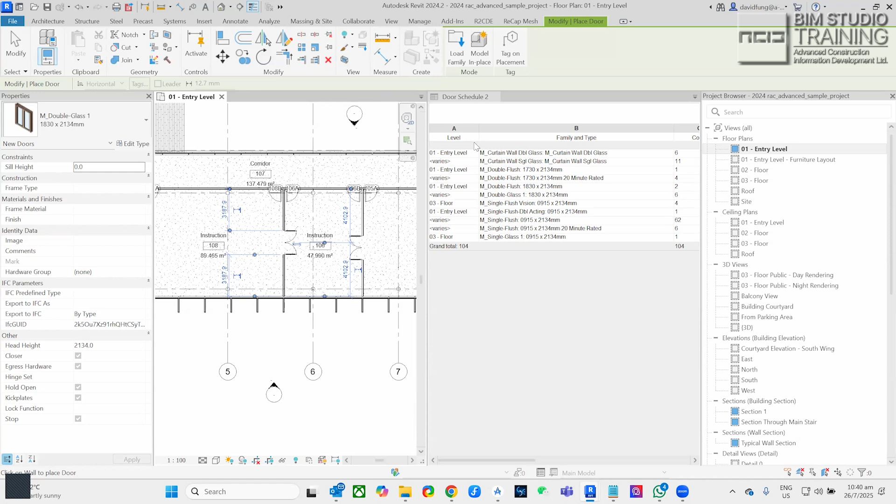So we said, okay, this is for QS to take this out. What if I show you? What if I show you, 20 years ago? What did I do? I did the

GBP submission to BD. What are these? Okay, forget about this overlapping. What are these?

What's this? These are 100% Revit. This is scheduling. All the submissions are automatic. Whenever I change the design, this will change the calculation, all automatic. The submission to BD has been automated.

We can save 70% of our work. ACS, automatic calculation system for GBP submission. It was issued 20 years ago. All the architects in Hong Kong can save 70% of their time.

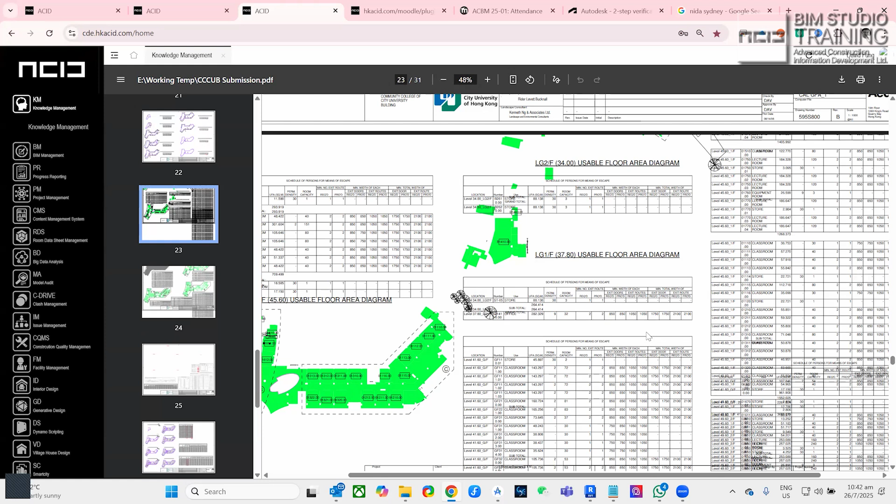No sales, nothing, 0. People don't use better ways, so we are the most unproductive industry. Okay, now and then later on, ASC takes it, housing takes it, BD. Okay, now look at BD now.

BD, BIM. BIM automated checking tools, area tools. Okay, if you click on this area tools, download the template. So what did BD do? BD employ a consultant to do this, to automate the process. Now become the automated tools for the industry to use.

So the BD employ a consultant. This one. My colleague, an architect, Samson Wong. Now he's the same as me as a BIM consultant. So doing a lot of this consultancy. So we did this 20 years ago.

And the architects in Hong Kong are still using CAD and draw line by line, doing the calculation Excel manually. And we can save 70% for the last 20 years. And nobody cares. Until now, you see the government actually adopted 2029 mandatory for everyone.

See the change that BIM bring to the industry. See how ineffective, how unproductive we are. Okay, technology is here, workflow is here, it's proven. But what is missing? Your change. You change. It's human. All right, people don't want to change.

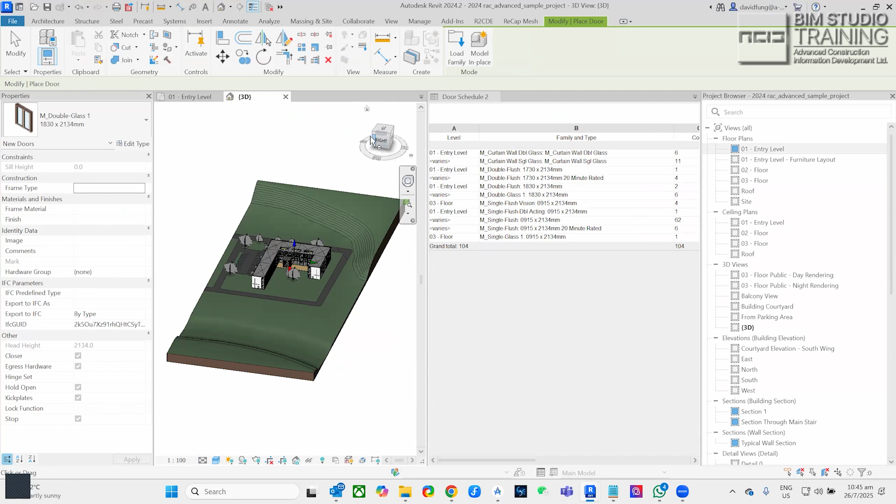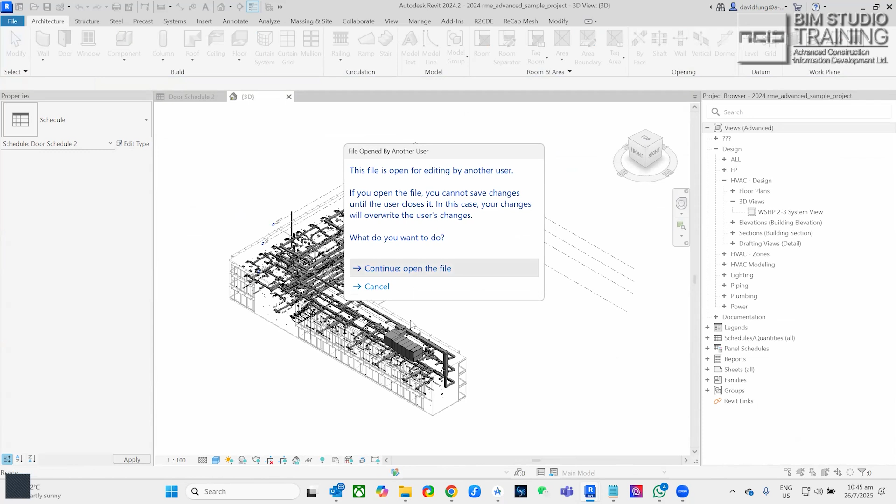All right. Now, can everyone help me to do one small exercise? Can you open up the MEP model? Okay, go to the sample. Go to RME advanced sample project and open that. Okay, everybody. Now let's do a small exercise. Now this project here. Okay, open it up.

Now, treat it as a game, treat it as a competition. Now, listen to what I say. You have a model of having a lot of E&M system, MEP system. I want to know, listen, which air duct is the longest? How long is that? Where is that? I want 4 answers.

What is the longest air duct? Longest. How long? Where is it? Okay. Now I give you time. Can everyone try and find me these 4 quick answers? The quickest one in my previous lesson is 40 seconds. 40 seconds. Okay. See if you can find it.

Which duct is the longest? How long? Where is it? Okay, go ahead. See how long it will take you to find it. Air duct, longest air duct. How long and where is it? How can you find these 4 answers?

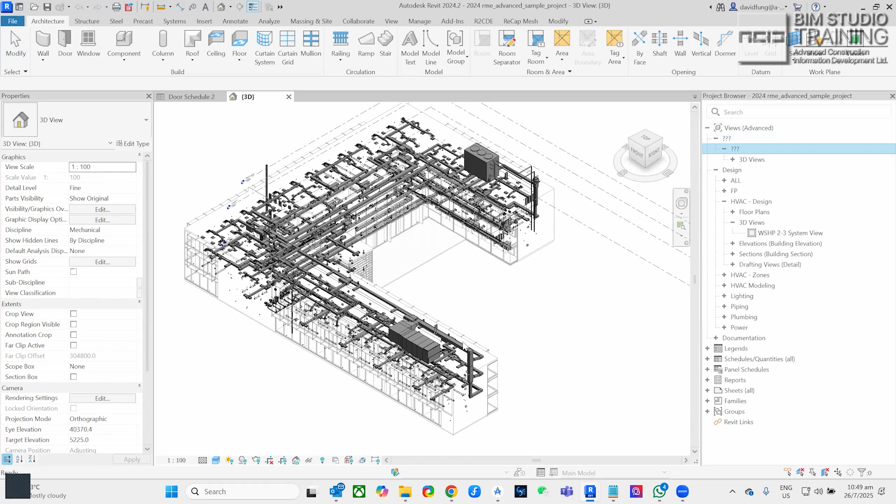Okay, location level 1 is correct. Okay, it is this one here. This one here. 52.71. Okay, this one's longest.

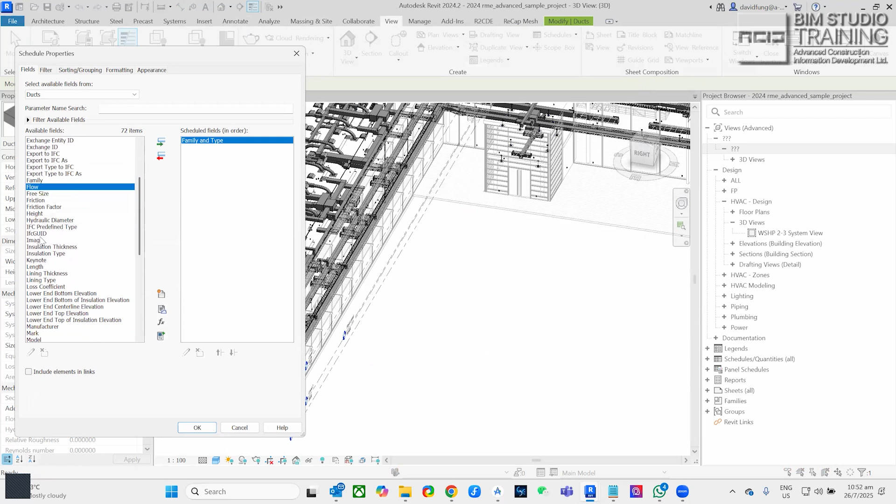And then length, that's it. In 1 second, you have all the length in here. But I want to say, what is the longest? How to work that out? So you sort it by length, descending order.

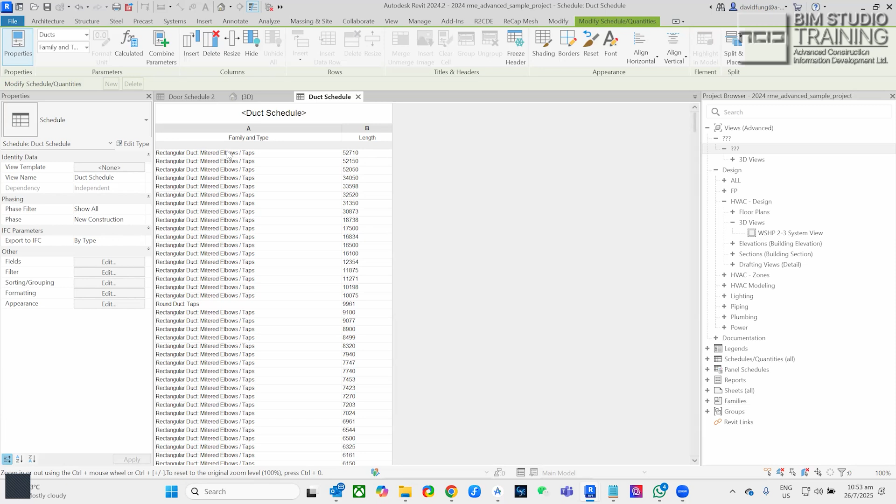Okay, where is it? Yes, you click on the longest one and highlight it in model. Click on this. There you go. You highlight it in here. So you can do it in 4 or 5 seconds.

You think in information. We don't think in model. So this exercise just wants to make you aware that if you look at it by eye, you are looking by luck. You are not doing it systematically, and you're wasting time looking for it.

You see these three are very much alike. How do you know which one is longer? You click on it and then read down the number. Or you try to remember - if you have 30 story, 50 story, you forget which is longer, right? They look pretty much the same length. So it is not systematic. Information is the key. So the value of BIM is information.

All right, so now you can see that this model has a lot of information that you can make use of. Basically, all the work that we do, whether you are a designer, a contractor, or BD, everybody in the industry uses information. But we just get used to using visual, using graphic, plan. This is a model. We don't think in information.

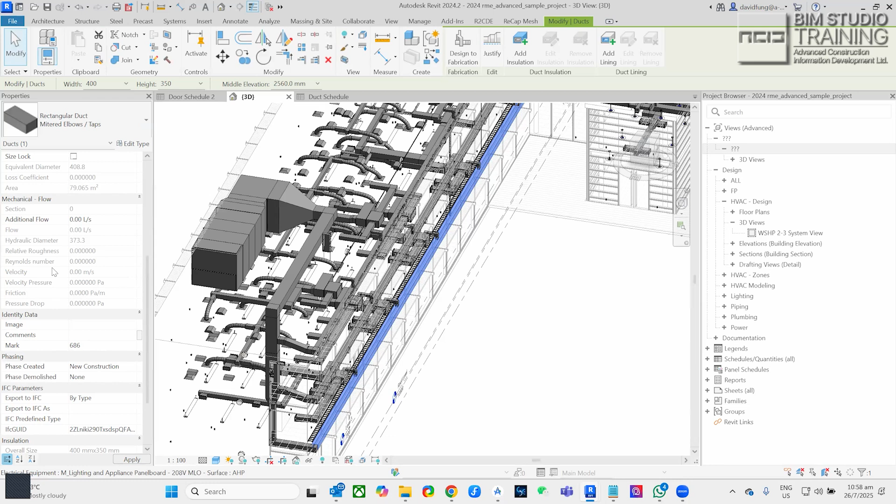Okay, think about this - now you're going to be a BIM manager soon. So how are you controlling your project? Are you directing the project to be geometry or information? I know that, okay, your company works a different way - you have a separate team doing the BIM, but you have a team doing the project and producing drawings. So the drawing and the BIM are kind of a separate thing. Is it the right way?

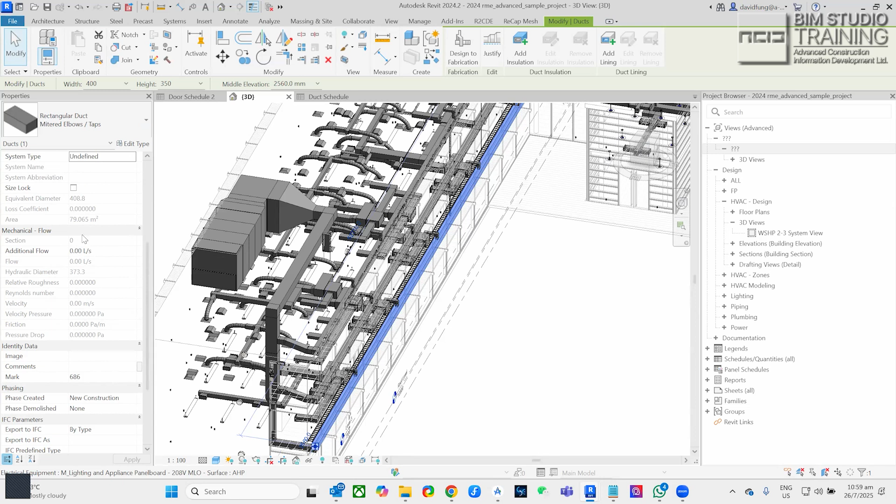Right, so one day, the drawing gets rejected, and then what? All right, now you can see these are the characteristics. So number 9, scheduling of information.

So this is a very important concept: single source of truth. You put information there. The information model is the model, and then you can schedule it out.

That's why I don't think Rhino alone or 3D Max is BIM. It's got no information there, it's only got geometry. So that's not BIM, it's 3D software.

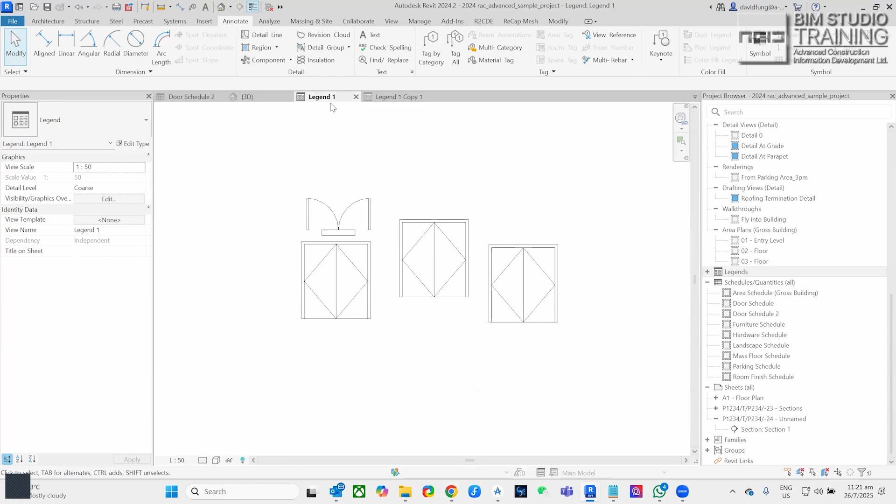OK good, alright, so we're talking about so many BIM characteristics.

It applies to every different BIM software. This is a common thing. These are important concepts that you as a BIM manager need to grasp, because these are related to the next topics in terms of BIM use.

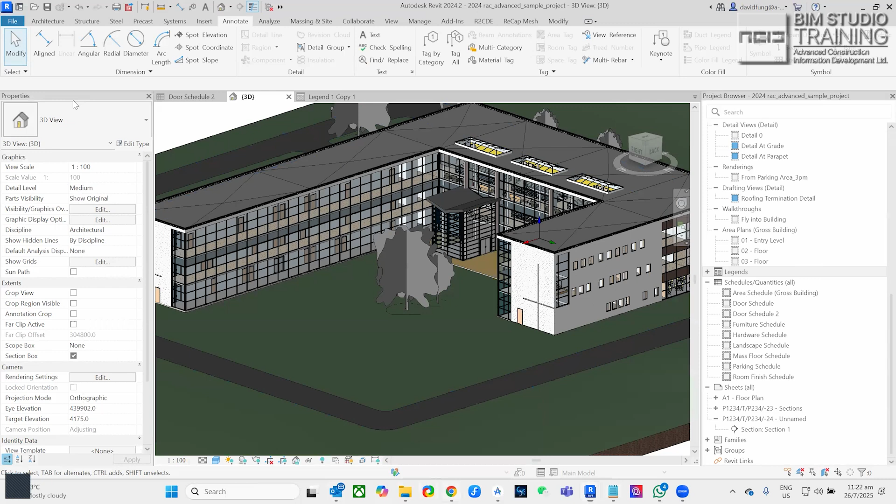Now, as I told you in the technical circular, in lesson 3, core competence 3, we are talking about BIM use. So we will be basically talking about 20 of them. These are the applications, but the technicality behind it is something I'm just telling you on the BIM software.

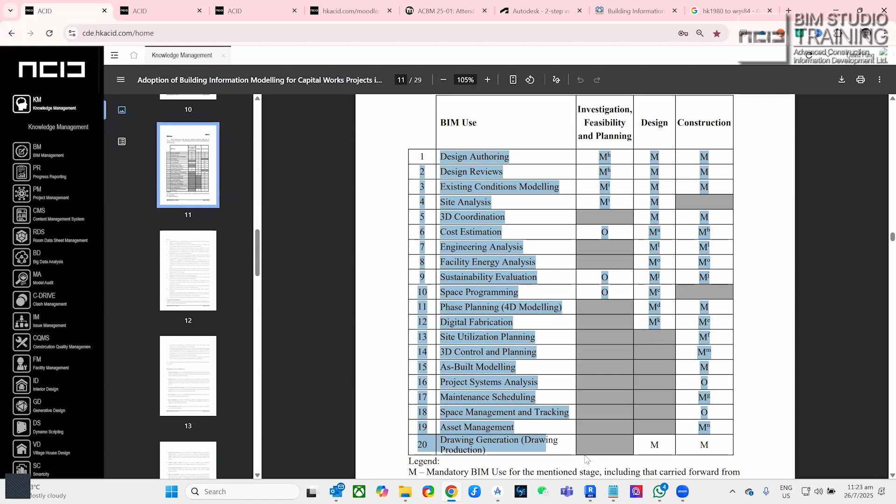All right, I think I'll just stop at the characteristics for the time being. Now I'll move on to the second part, which is on the technology side. If you put this technology into context, these are the context - how technology is being used.

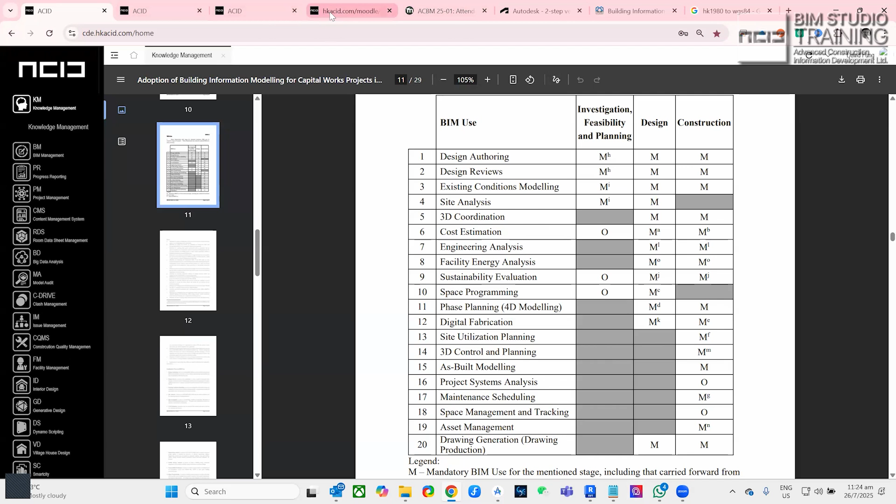Now, the way we look at it - if I call upon this one here. Now if we look at the technology, the second part, we'll be talking about 14. 14 technology here, 13, and then here 14.

So how can these technologies apply into different contexts? Say, for example, if I jot this out. Okay, now if you look at it this way, the way we understand this.

Let's say we need to do something called 3D control and planning. 3D control and planning, which is mandatory - this is how we use BIM in construction. But what does it mean? What is 3D control? Now, this is the way we use BIM, but the technology is actually in here.

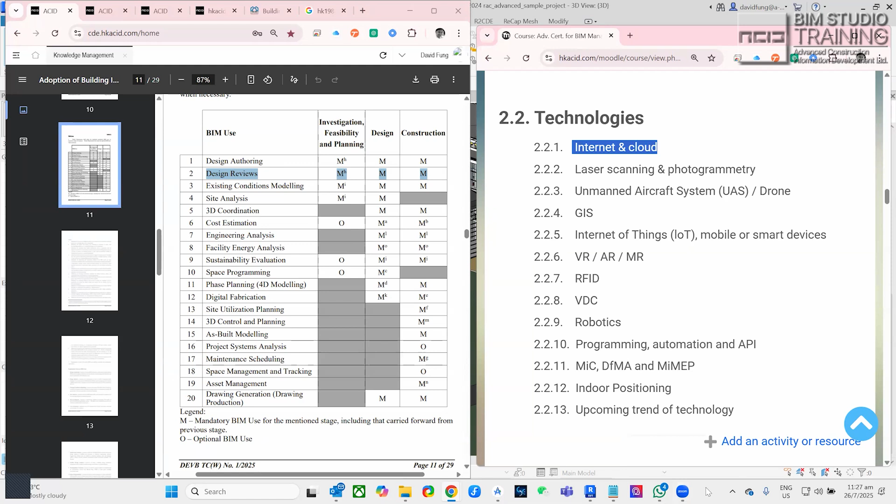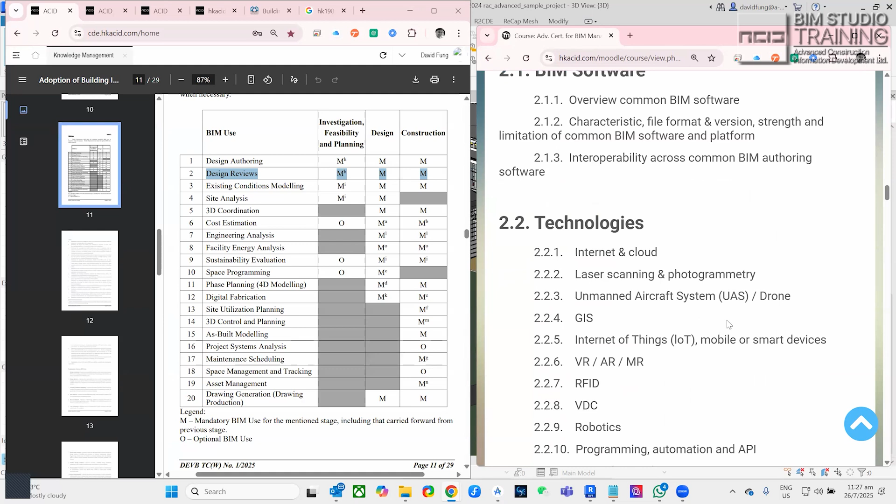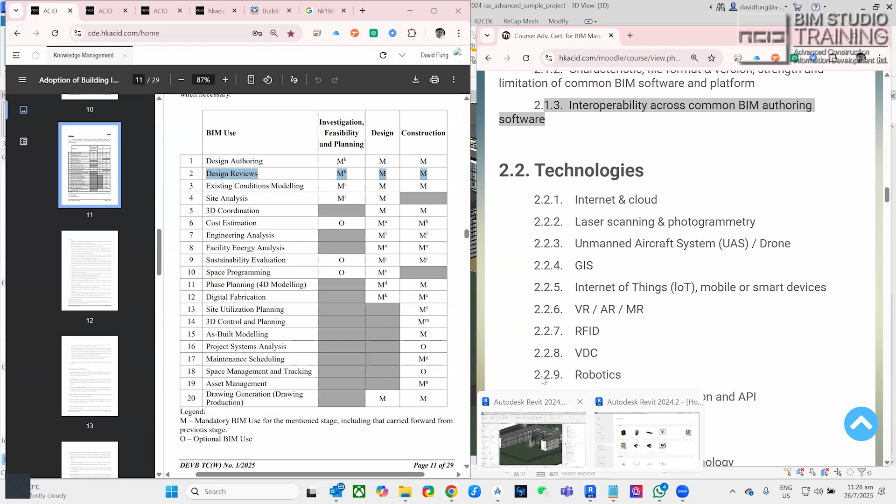All right, now let's look at it from the start. Or probably I can cover this as well. Before I talk about this, let me talk about this one. Now if you look at BIM software, obviously this is Revit.

This is the architectural model. We look at the structural model, we look at the MEP model. So those are the different people working on the same project using the same platform. What if they are not using the same platform? What will happen?

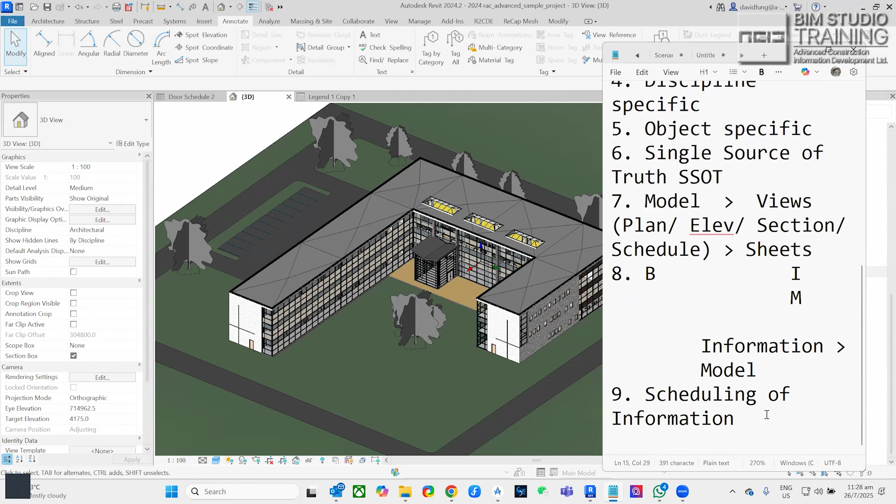If I ask you now, if you look at this model here - so the building is done by Revit. What about the trees? What about the road? What about the landscape, the terrain? I tell you what, people use Revit to build the terrain, to build a road.

It is horrible, it's terrible. I once worked on a project where the building is fine, but all four sides have different slopes - it's not flat. They all have different slopes on the four sides, and they're not single slope - very complicated terrain. Then we use Revit - I spent months to model it. It's terrible because Revit is not meant to do this kind of thing. You know what is good at doing this terrain?

No, terrain, the modeling. GIS is not about modeling. GIS is a platform that combines everything. So what modeling tools do you use for terrain? Civil 3D. Civil 3D is good at doing this, because the road is not flat. Of course elevation goes up and down, but even on a little section, the road is not flat.

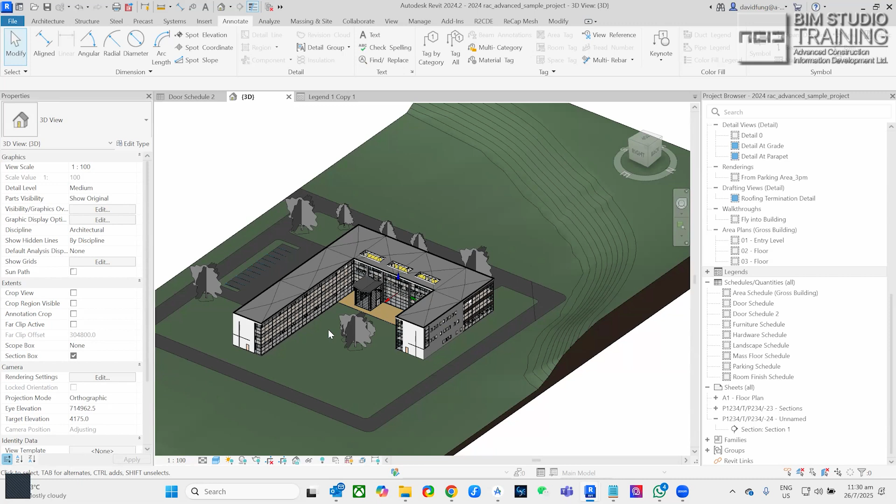It's doing a slight curve at the sides because the rainwater will fall down to the gully. All right, now you guys know about that, right? So Revit cannot do that. Revit is not a good tool to do the site and the terrain.

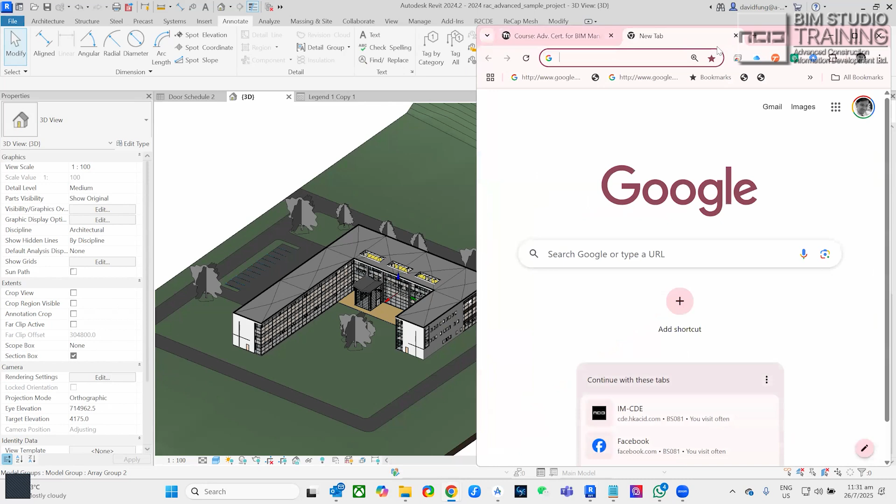Landscape, you see the trees? That's quite terrible. Now, what software do you use to do the landscaping? Do you know? Okay, CS Artisan. Okay, you can see that.

This CS Artisan is actually a plug-in software added to Revit. So using Revit alone is not good enough. Why? Because of things like this hatch pattern - if you want them all the same height, same type, but following the terrain, using Revit to build one by one is no good. It's very hard to do. So they use this add-in called CS Artisan.

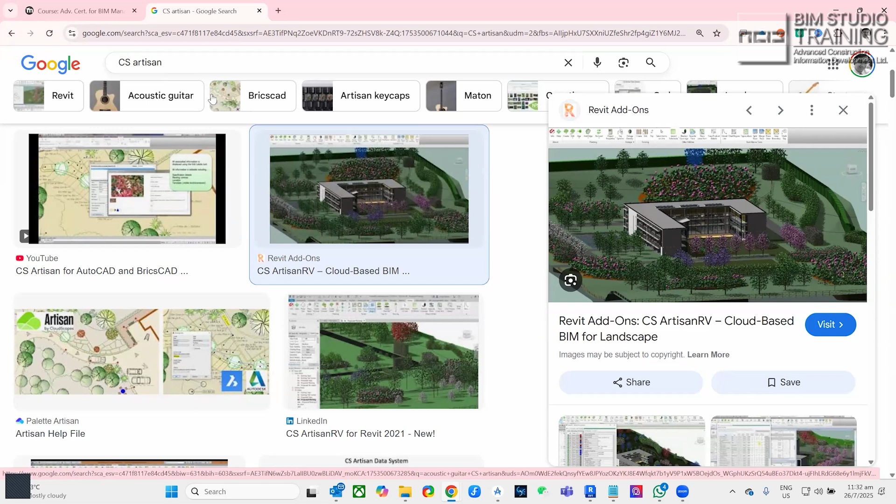This is something I teach in ASD for the landscape architects. I teach them how to use that. Even though it's still Revit, it's the add-on that makes it easier to do this kind of thing. All right, CS Artisan.

That means we will end up with a lot of different softwares. To an extreme, you can imagine I have one project with government. So it's one ASD project. What they ask for: architecture, they use ArchiCAD. They need to use ArchiCAD. Structure, they use Tekla. MEP, use Revit.

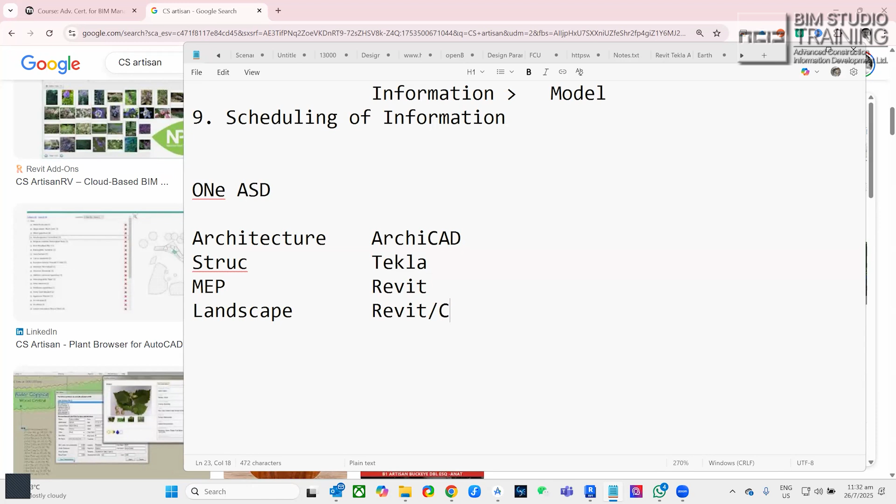Landscape, using Revit, CS Artisan. Okay, CDE, Trimble Connect. Structure, civil - Civil 3D. This is one project in the design.

Think about this, this is an example, a very extreme case. So if everything is like this, what level is this? Level 2 BIM. They do not talk. How can we work? How can we work as one project?

So okay, you can see the difficulties. Now, as a BIM manager, the client asks you, this is how I want it, this is how I want it. So how can you handle this? Not everyone is using Revit, so inevitably you have no choice but to come to the concept of open BIM.

Small letter 'open' and then big letter 'BIM'. You see this concept, open BIM. The keyword is interoperability. Interoperability - how can we talk in the data? Interoperability, so they can talk to each other. So now there are two levels of interoperability: one is on the geometry, one is on the data, on the non-geometry.

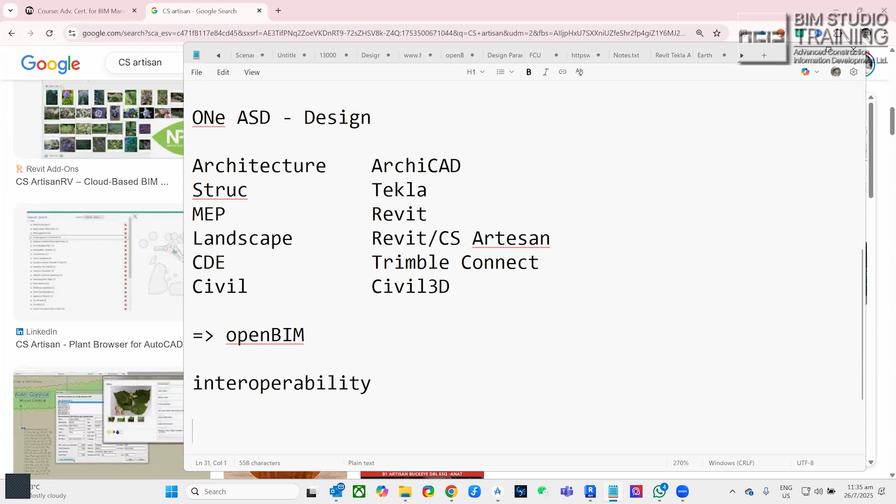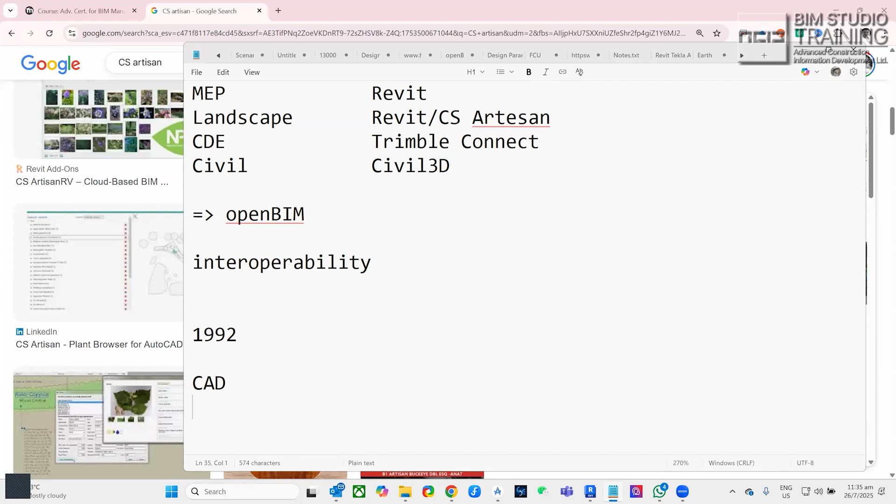So if you're not familiar with this, let me give you an example. In the year of my graduation, I graduated in 1992. All right, I graduated in '92. When I started working, this was a time when our industry started using CAD. When they used CAD, there were two camps: one is AutoCAD, the other camp is MicroStation.

So in the industry, CAD is the general name, this is a brand name. There were two companies doing very well in CAD. In the 1990s, they could not talk to each other. AutoCAD could not talk to MicroStation, MicroStation could not talk to AutoCAD. So what was the answer?

Do you know? So they created a format called DXF, Drawing Exchange Format. Now from AutoCAD, they export to DXF and then import to MicroStation, or vice versa, and it comes back like that. So they needed a middle format - they couldn't directly talk to each other, so they used DXF, Drawing Exchange Format, to communicate.

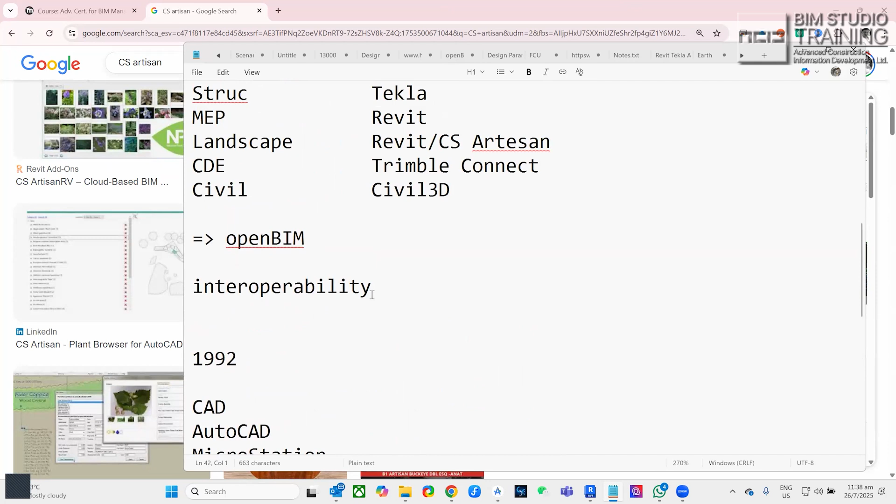That's it, so it's easy for translation. But in BIM, it's different - BIM is very complicated. So at the moment, we still cannot have direct communication. What that means is, for example in Revit, what you can do is export to a format, an open BIM format - at the moment, IFC format - and then import to another software like ArchiCAD, or vice versa, coming back like this.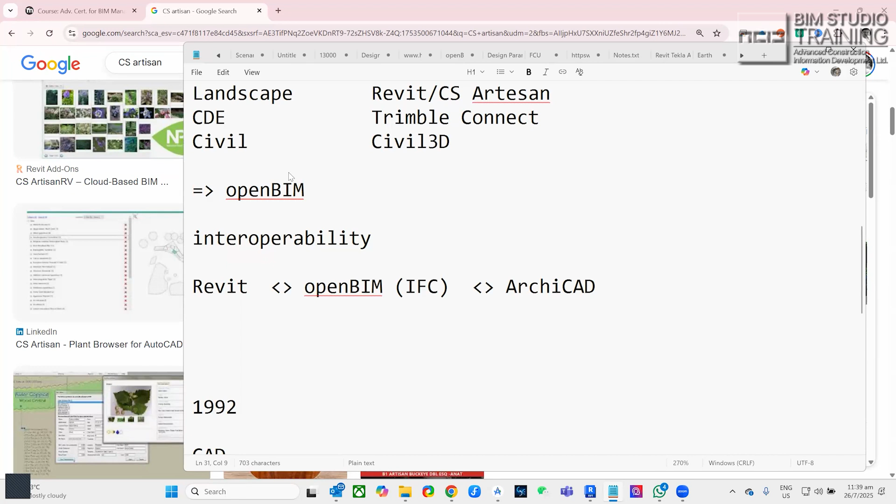So you have this middle format called, at the moment, IFC. That's why last time you heard about the Lands Department talk about native BIM and open format, level 2 and level 3. So IFC is one format of level 3, and CityGML is another format, which is also open format. Now this concept of open BIM, if you go back to the technical circular...

What is the policy? The policy is now required: BIM model in open BIM format for asset management should be prepared. So BIM model in open format for asset management is what? It is the time where the contractor hands over the BIM model to the operator, so you need to give them a BIM model in open BIM format.

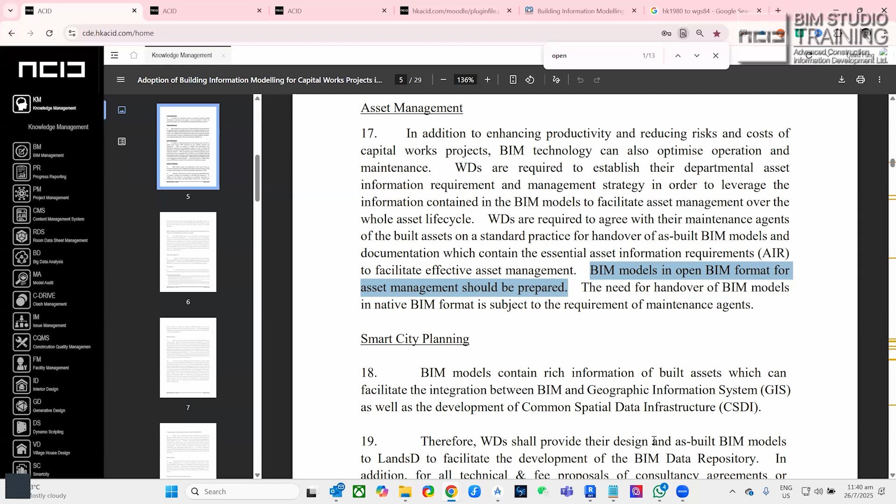So asset management, the operation - he's talking about the contractor delivering back to the operation in open BIM format. And also, Works Department should consider to use - they should use open BIM approach in project collaboration, except individual circumstances. Now that means only with exception do you not have to use open BIM.

So this is exactly the project I just told you. They have different formats of BIM software. Project collaboration is talking about different people - different people can use different software, and then the project collaborates using open BIM. Now this is another policy. Get that?

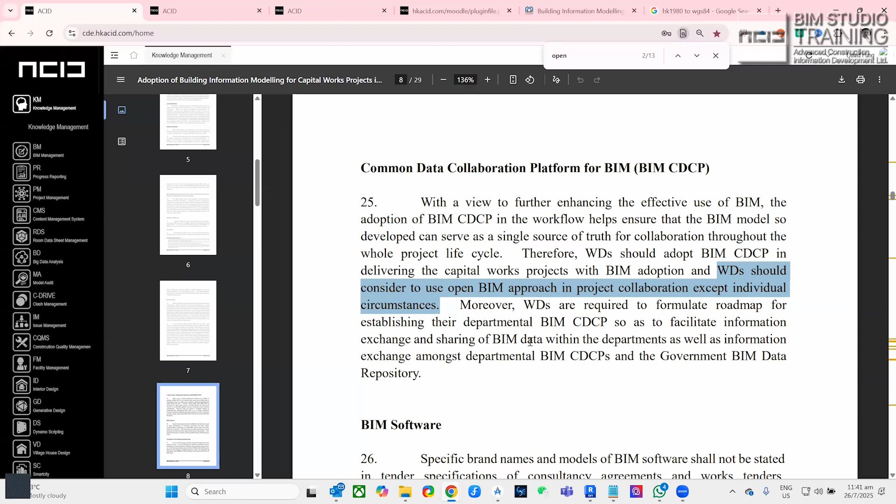Works Department should accord priority to consider adopting open BIM in different project stages. So in software, open BIM is a priority. That means they do not promote just one platform - they promote different platforms.

Now, as a BIM manager, this is a really difficult situation. If you have different stakeholders using different platforms, how can you make them talk to each other? It's a difficult task. All right, now I tell you what - for this project, yes, we use this.

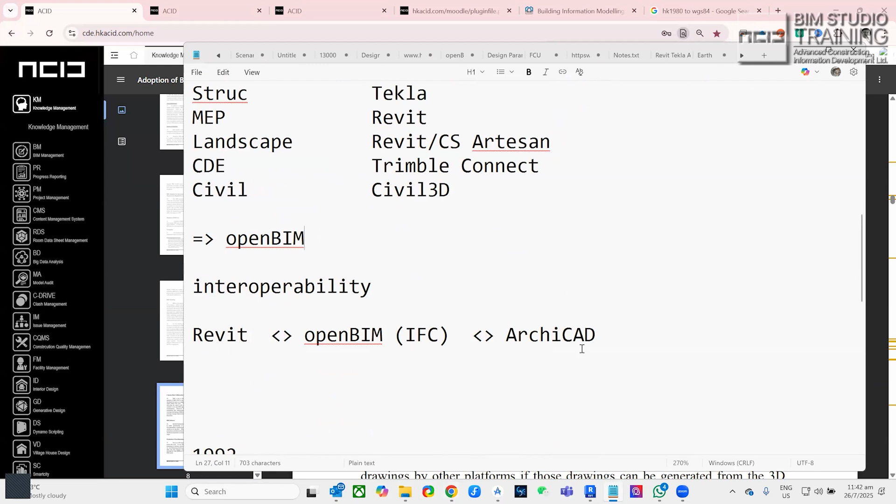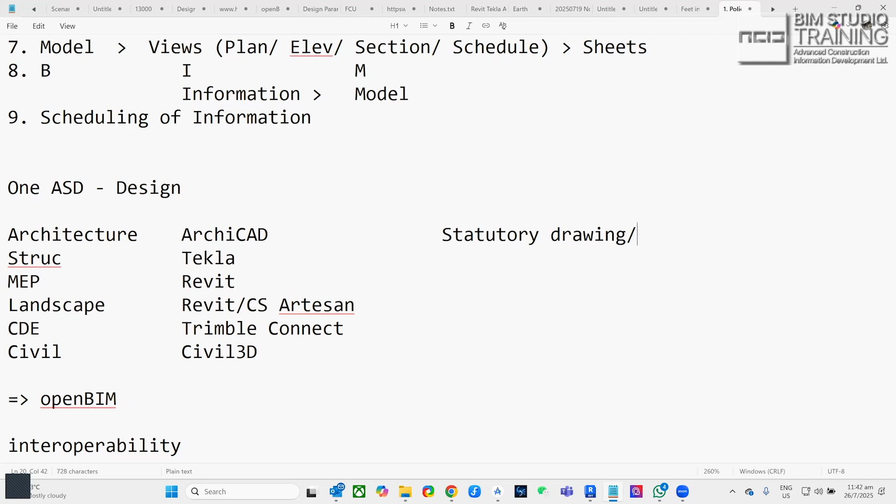Now look at this. What do we use this for? They produce architecture, produce statutory drawings, they produce tender drawings. Structural engineer, they produce statutory drawings, they produce tender drawings. MEP, they do not need to produce statutory drawings, they produce tender drawings. Landscape, tender drawings. All right, QS.

Now another difficulty - this is what I have experienced, this is the real situation. So the architect uses ArchiCAD software to produce GBP, to produce structural submission, audit submission, right, sorry, Tekla. For tender drawings, they produce different architectural tender drawings, structural tender drawing, MEP tender drawing, on another platform.

QS need to measure this, they need to measure this, and they need to do this - that's difficult for the QS. So the QS needs to know 3 different softwares to schedule. The one you just learned scheduling is from Revit, but what about ArchiCAD? How do you schedule from ArchiCAD? How can you schedule from Tekla? They have this kind of concept, but you need to learn it. So the QS needs to know all this.

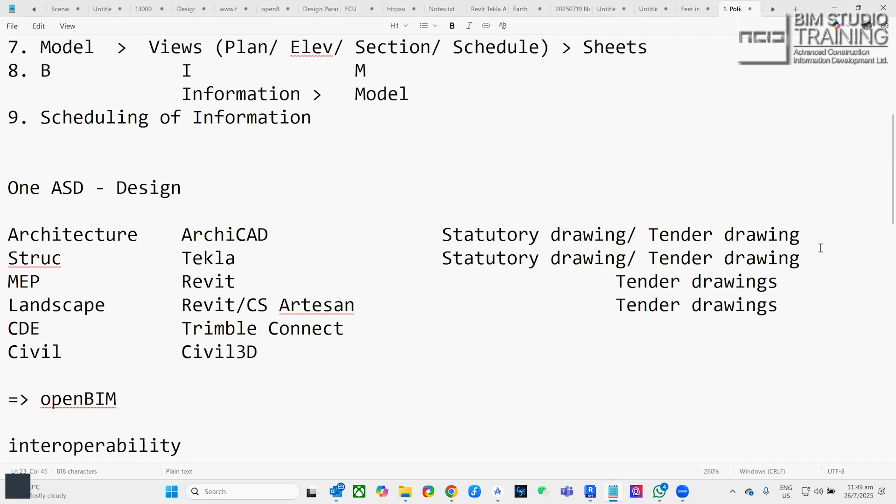It is quite complicated, I have to say. But you can see that now it's a policy here - it's facilitating the use of open BIM. So our first core competency, open BIM, is also one of the policies.

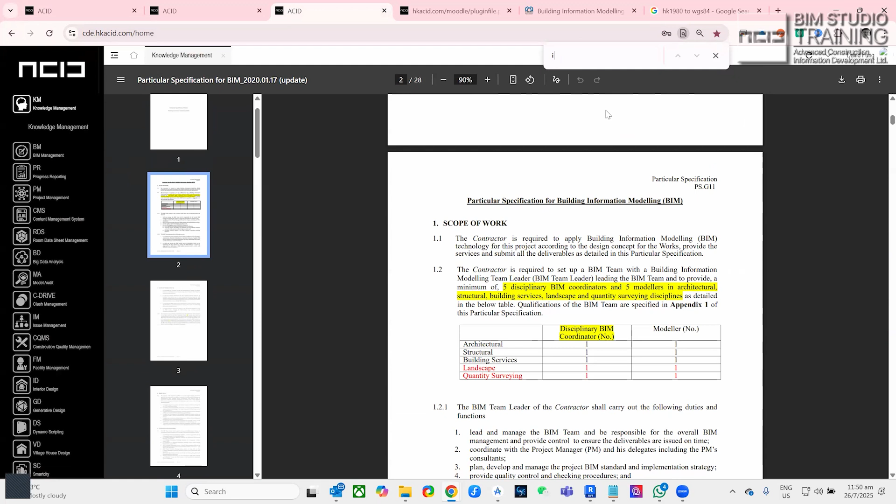If we look at it from the contract point of view, I showed you last time. Now the contractor shall submit in the format the contractors use. You produce a BIM model using native and editable formats. If you use Revit, you submit Revit. At the same time, you need to produce IFC, the open BIM format - two formats. So if you use ArchiCAD, fine, ArchiCAD plus IFC. Tekla plus IFC.

But it did not address the situation where the consultant uses open BIM and you are not open BIM - then this is an issue. And then later on, how does the contractor give back to the operator?

Think about this. If you are the contractor, you keep on using different systems - Tekla, ArchiCAD - and then you go back to the operator.

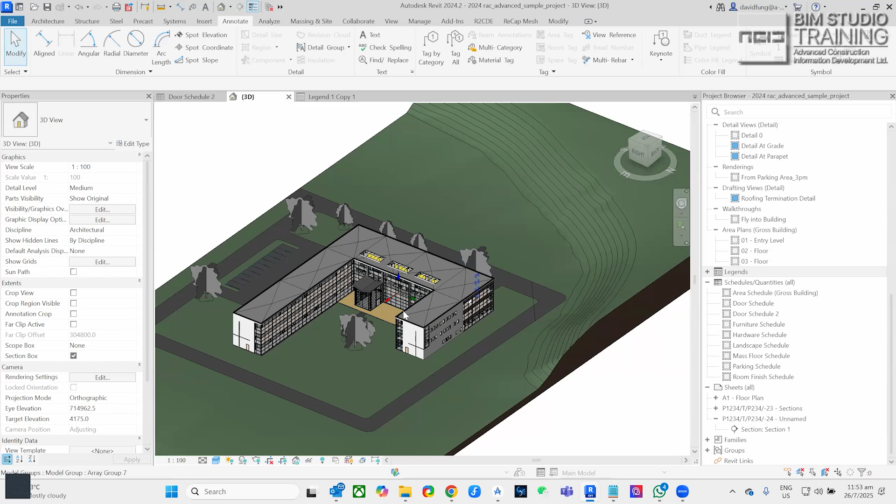Okay. All right, but the thing is, this is called interoperability. Now if you look at Revit, so just a few technicalities on this.

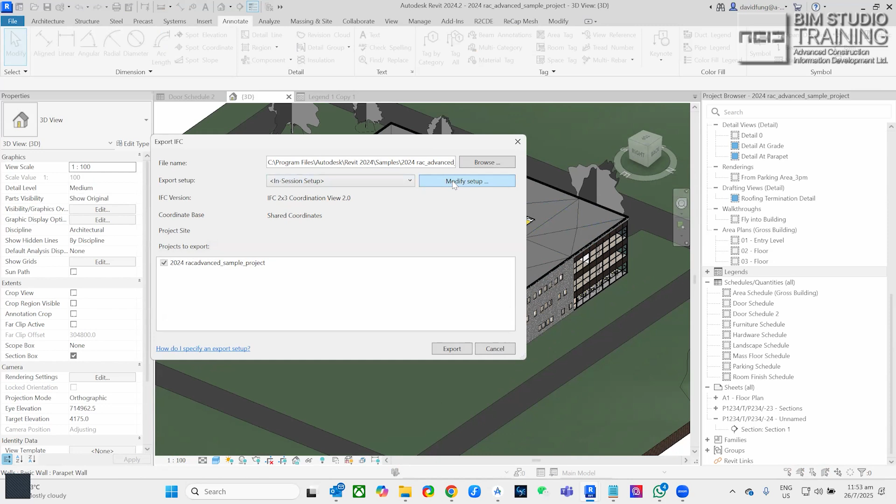So this Revit, all this kind of thing is called - if you export to IFC, okay, you export to IFC. Now, you can see the Modify setup.

See, even in IFC, they have different versions - 2x3, 2x2, 4, 4x3, now even 5, different versions. Their versioning is different to the Revit version. Their versioning only means they include more and more objects. So 2x3 is putting on buildings - they do not have roads, railway. 4.3 has civil, 4.3 has rail, so railway objects. But the building object is still the same.

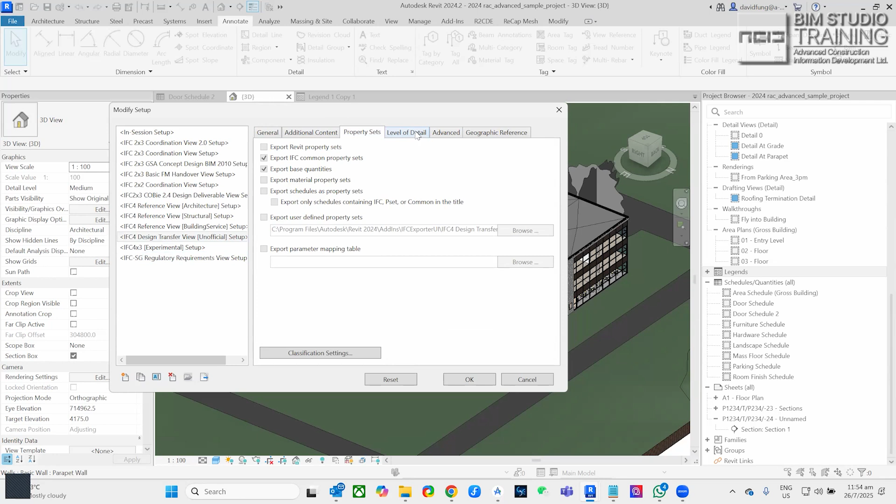So even if you export this out, let's say, okay, I want you just to take a look at the definition. Now I just click on a door. Now when I say interoperability, what does it mean?

A door, as I said, has information, and the information has definitions. So that door has a height, this one here has a width. Now these words, height, width, thickness, these are the words used by Revit. What about how they describe the width in ArchiCAD? How do they describe it in Tekla? They may use a different word.

So this is called thickness. What if ArchiCAD uses door thickness? Then you have two different names, and then you cannot talk. So that's why different software use different names, and that's why they cannot talk because of this kind of naming issue.

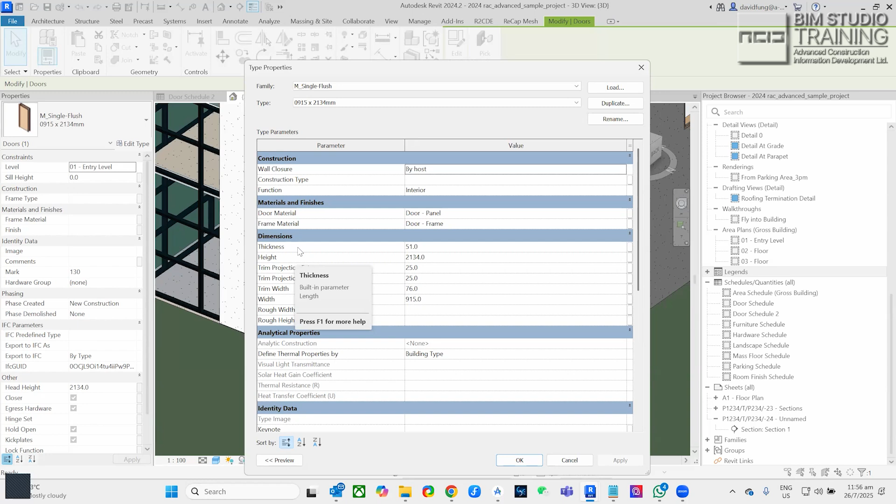So what IFC does is have a standard. Now what does that mean? If I look at this, if you go to the IFC Predefined Type, okay, I click on this. Now you can see these names, IFC door, IFC railing.

Now these are internationally defined names. If Revit can convert into this name, ArchiCAD converts to this name, Tekla converts to this name, so that becomes a standard. It doesn't matter what you call it in your native software, as long as you convert into a commonly named system, then they can share. So this is the idea of IFC, open standard. Somebody at buildingSMART actually defined how this should be called internationally.

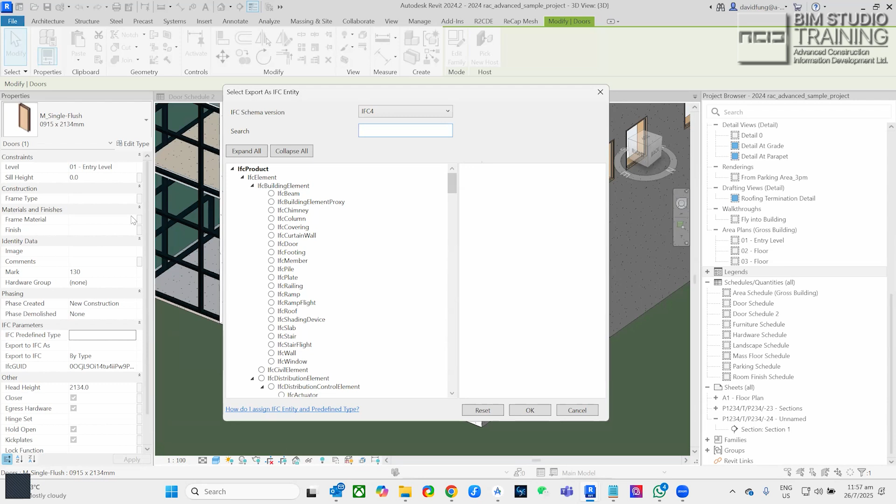Okay, now to be more specific, the naming is one of the items. BSDD, Building Smart Data Dictionary. So what is a door? A door, we have thickness, we have vision panel, all this kind of thing.

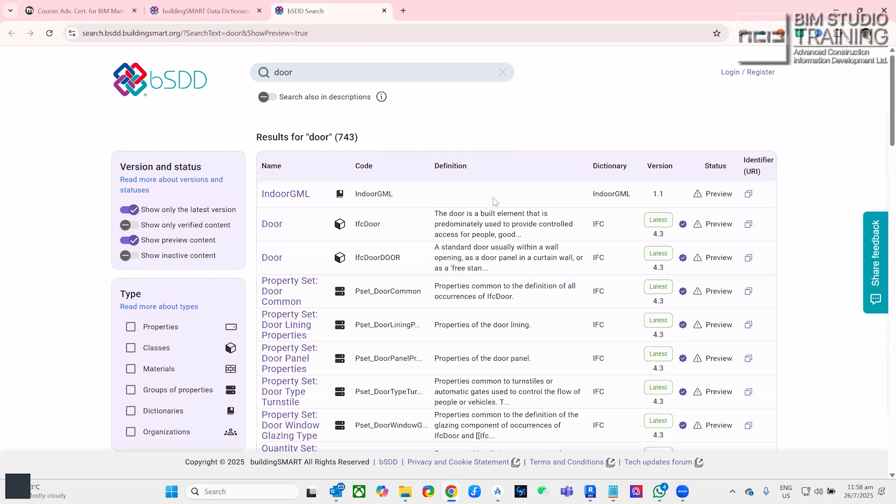Okay, what if I type in door? How is a door defined in OpenBIM? So I search for door. Okay, see door, property set. Click on the property set, properties. You see that? Acoustic rating, durability rating, fire exit, fire rating, glazing area.

Right, now these are the IFC names. Revit uses a different name. ArchiCAD uses a different name, so that's why they don't talk. What if both convert to the same name? Then they have the same meaning. So this is called BSDD, data dictionary. It is for us, so somebody defines millions and millions of these definitions, and then different software convert to this data dictionary. Then they know, then they have the same meaning.

Two weeks ago, BD was here. The assistant director was sitting in here, and he said BD is going to use BSDD a lot to define the names, all the submissions. That means this automation here was based on Revit alone. What if ArchiCAD? How can you automate ArchiCAD? How can we automate render? They have to use the same name. Then you can have all this automation.

Now what is it? Information. BIM is talking about information. BIM is not just talking about geometry.

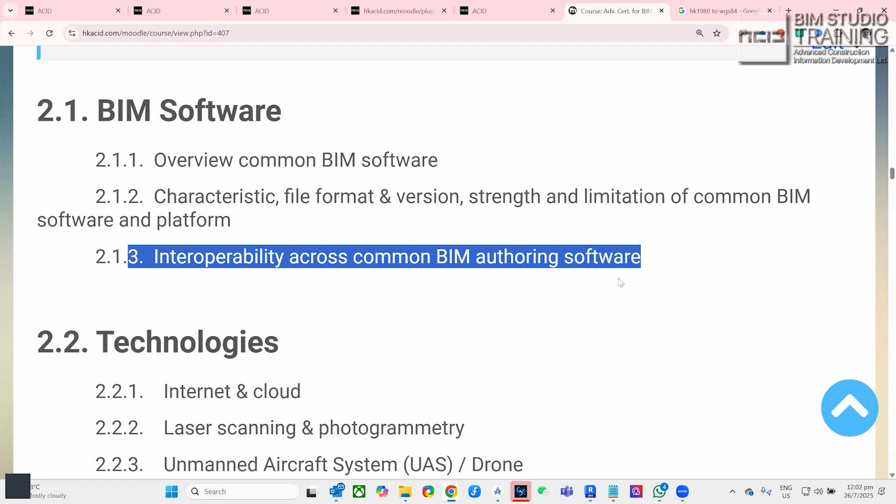First one, very simple, internet and cloud. So you use cloud, right? What do you use cloud for? How is it related to BIM? Saving to cloud, document saving to cloud. Which cloud? Okay, your company using AliCloud, where is it? Okay, that's good, that's good. You're not using China AliCloud? Okay, what else, what else?

Okay, fine. Okay, now a little bit technical on cloud. Do you know there are three types of cloud? Now when we talk about cloud, okay, there's something called public cloud, there's something called private cloud, and there's something on premises.

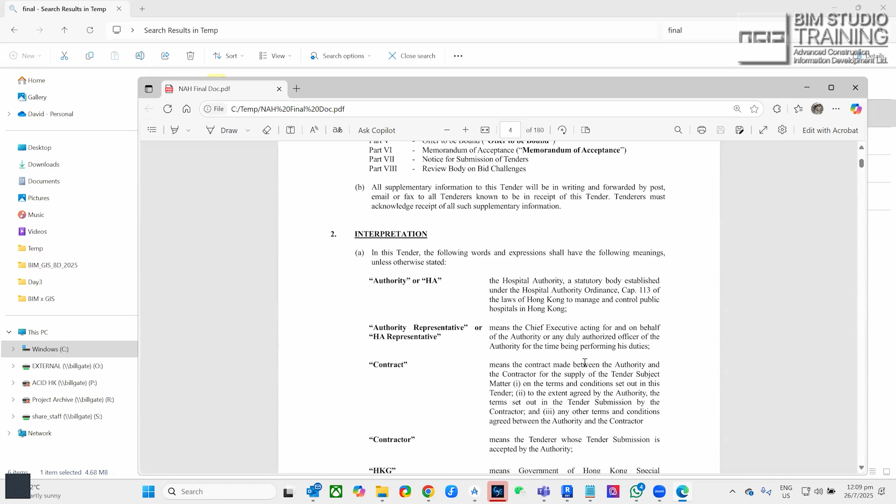Let me try to find you an example. Okay, now I got a tender. I think this is your project actually. This is a project that you guys are building at the moment. Now the hospital authority just issued a tender. It's not yet closed, it's still bidding for this. Now you guys are the contractor, and I work with the consultant team. So you guys build on site at the moment. Now this is coming from the client, and they are bidding for the operations using BIM for the operation now.

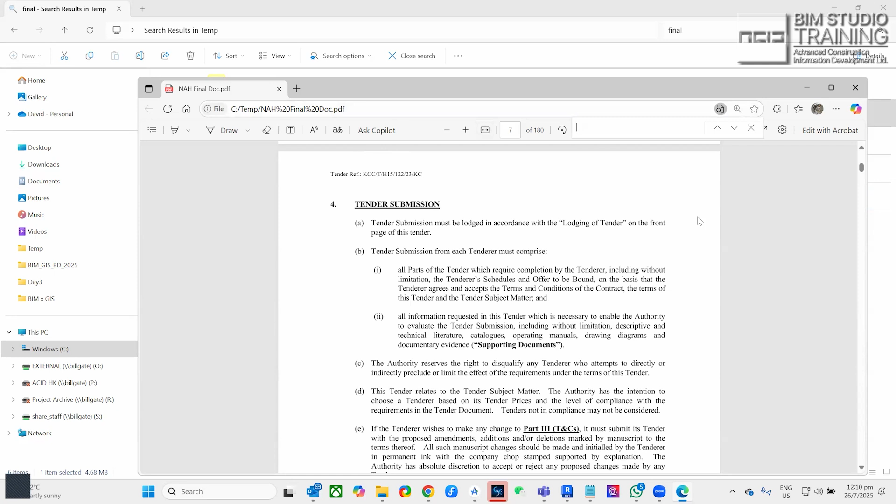That means after you deliver your BIM, then they will pick this up. Okay, now see what they want. They are going to develop a BIM system, and the system should support on-premises deployment. Now, they already specified this on-premises. So what does it mean, on-premises?

Now, it's a multi-billion project, 300幾億嘅呢個 project. Okay, now after you guys construct it, and then they can pick it up, and they need to save the information, they specify on premises. So you, as a BIM manager, what does it mean?

That means anything wrong within 4 hours, you have to be there. Anything wrong with the system, 7 times 24. If you sign up an agreement, so within the level of service, if it's more stringent, within 2 hours you need to be there. Or within 4 hours, or within 24 hours, depends on how you talk with them. So you need to physically be there and fix the computer, the system there. You cannot do it online.

So how much money do you allow for it? For the next 10 years, they spent 2 years writing it and then maintain it for the next 9 years, 11 years. So it's a bidding at the moment. How much money do you allow for a team going there within 4 hours maybe, 7 times 24, right? So 3 o'clock on Saturday midnight, something wrong, and then somebody you need to be there within 4 hours. Yeah.

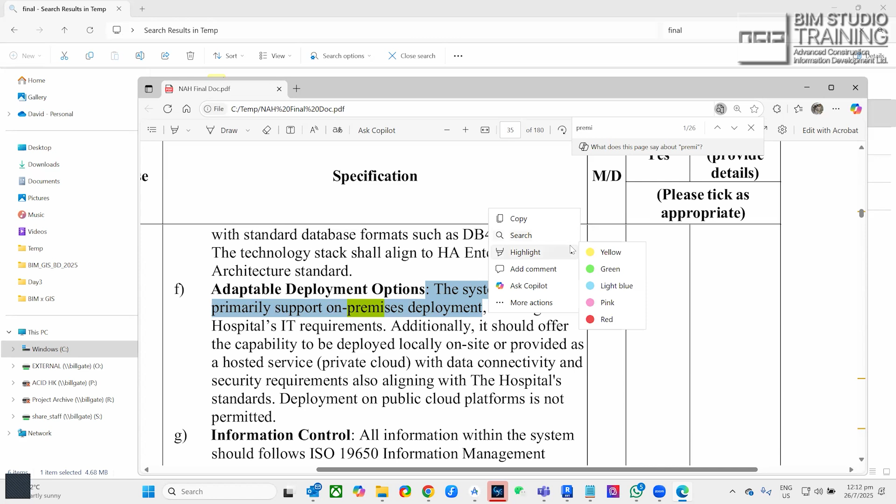So public cloud, you share with others. Okay, but the thing is, it is being accessible anywhere as long as it's via internet. You can go there and fix that. And also it's cheap because it's shared. So the security is done by the data center, not being hacked or something, done by data center.

Now, private cloud only within organization, you don't share with others. It may be accessible through internet, yes, you can do it accessible through internet, of course via password. It's not cheap because the client maintains the system. So they need to have IT guys, they need to have all the support. So the security is done by owner.